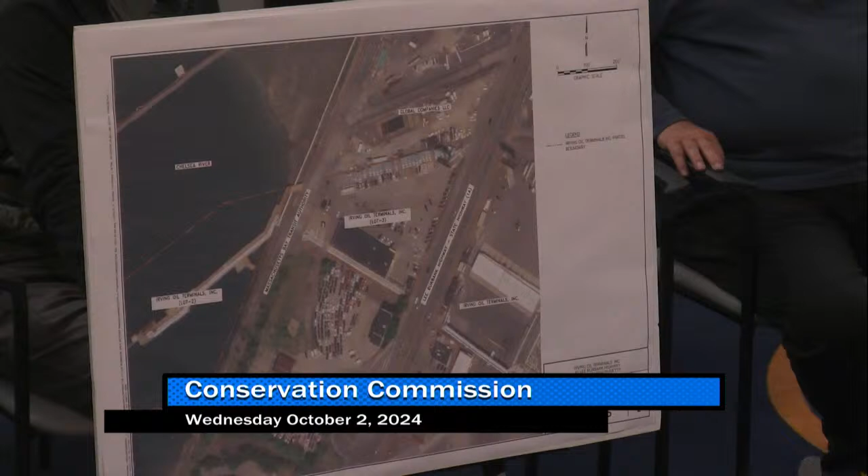The project is basically a routine inspection of underground pipelines. Essentially what Irving needs to do is daylight those pipelines. It's a shallow excavation project in two localized areas.

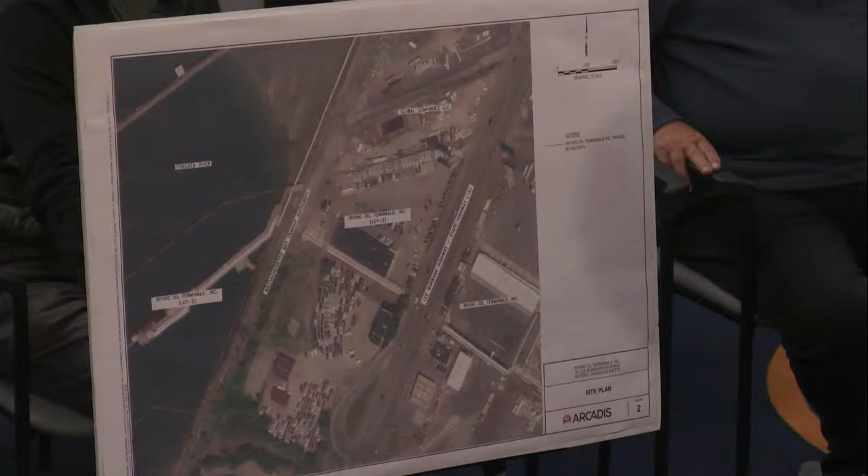Yeah, bring it right over. Yeah, there you go. Pulling a fast one on us. If you can see that, it'll be, we should be able to get it up on the camera. There we go, back it up just a little bit.

While he gets set up, basically they're going to excavate the pipes. They have a planned laydown area for what they excavate out, and they will be putting it right back. They'll have erosion controls in place, probably, I'm assuming. I can't speak to that just yet, but you did send some photos over of where you're going to be doing the soil lay down, and we want to make sure there's no leaks in this area, so it's definitely mandatory work at this point, but that they won't be making any impact.

I can't remember the exact depth, what was it, 2.5 feet or 3 feet? If you put it on the other side of the podium, the camera will be able to see it better. If you move it further, literally on the other side, yeah, right there. We can all see it too. How's that? Perfect, and then we can see it up on the camera.

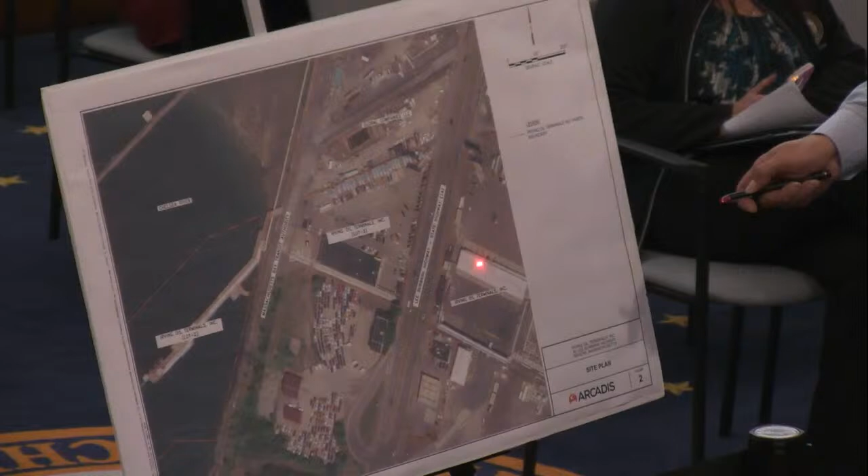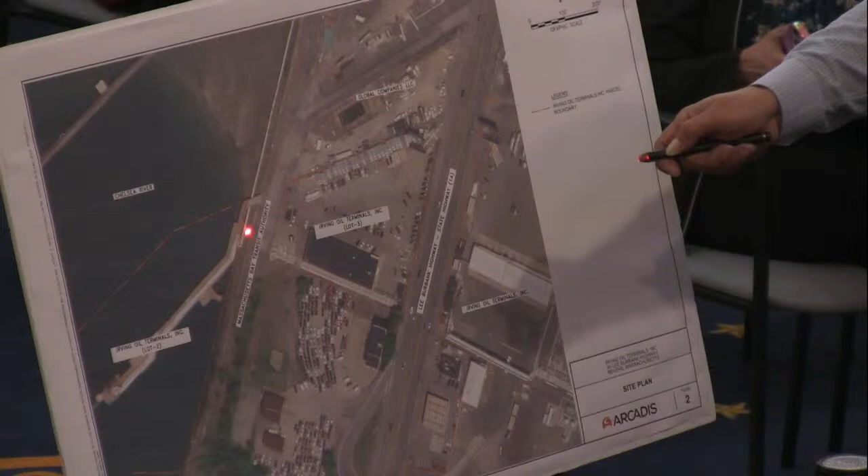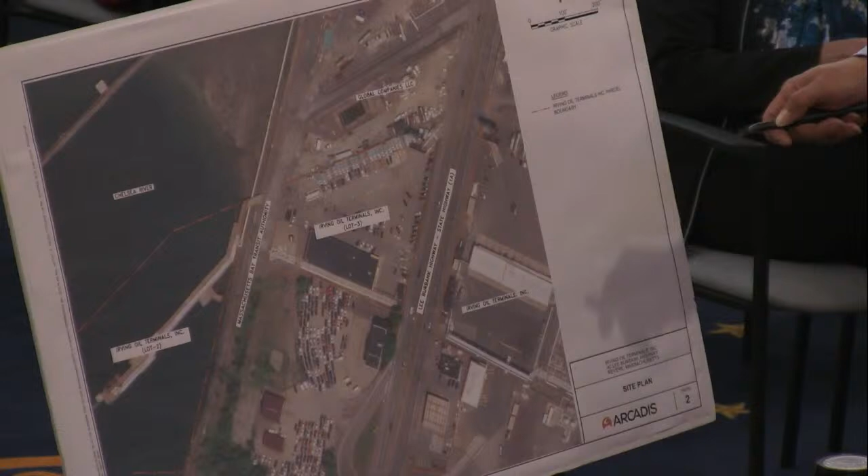Thank you. So the excavation is going to be about roughly 4.5 to 5 feet. Okay, so basically, this is Burbank Highway here. Irving Terminals owns property on the eastern side of the highway, and then also on this western side. We're working adjacent, essentially in the upland area adjacent to this pier location. You can see the white pipeline that's daylighted along the pier, comes across this MBTA property and then traverses up towards the Irving Terminal. The area we want to dig in specifically is two locations shown in red here, a little bigger here. This is approximately 30 feet in width, and this excavation is 30 by 14, I believe, and then this one is 30 by 4 feet.

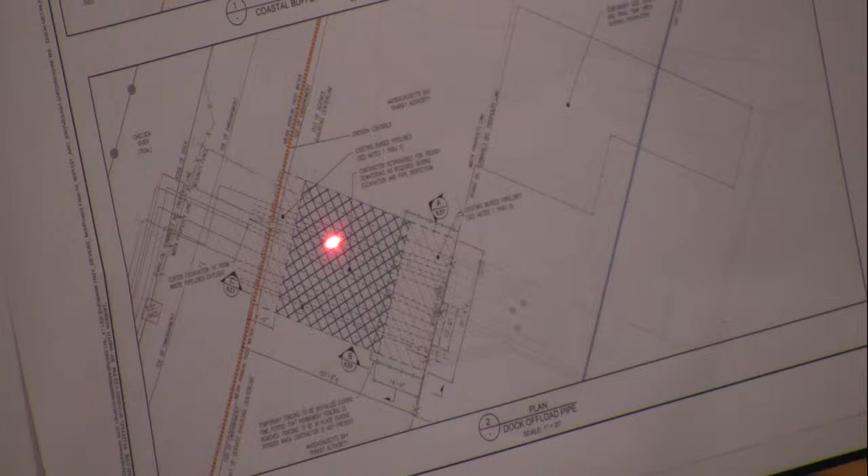So the ones that are on the outside are where you'll be excavating, correct? Correct. Okay, and what are you using for erosion controls on the pier side? Because it's pretty close over there, or not that close, but you still have the train tracks involved.

Right, we would be excavating essentially right adjacent to those former railroad tracks, which still have some ties there. It's definitely arduous work once you get closer to the pipe, so it won't be using an excavator to throw it all around. It's going to be time-consuming to get around it, but from what I perceive from the project, the way you explained it during our site visit.

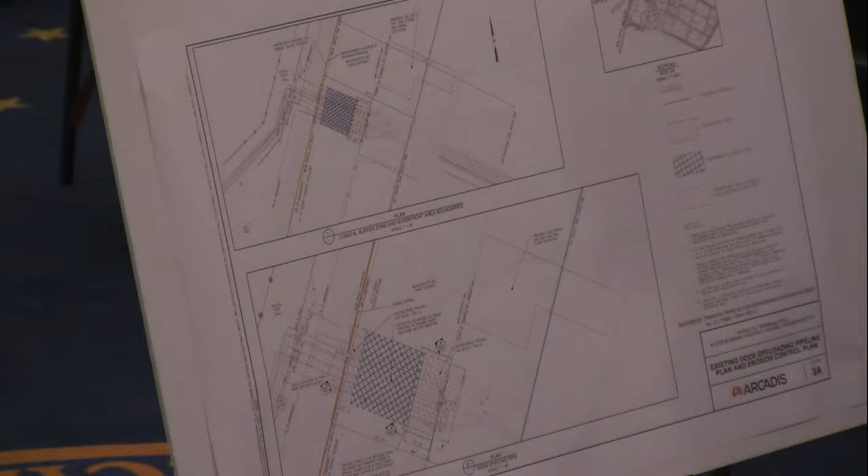So I'm pretty comfortable with this, but at this time I'd like to ask any of the commissioners if they have any questions. Yes, Mr. Chairman.

One simple question. It's not going anywhere near the Lee Burbank Highway, it's all on the Irving property, correct? The actual dig is on MBTA property, and then we're going to be staging soils temporarily on the Irving property.

And the other question, these pipes are taking material from where to where? It's coming from tanker, from the pier, offloaded through the pipeline, and then back up onto Irving property.

You know, I seem to recall a few years back that you came before us, I think you were shoring up the bulkheads and the pier that Irving has. Wasn't that so a few years ago? That came before us for that?

I don't remember that. It's possible, I have no knowledge of that though. Well, I've been on for a long time. And I thought if it had something to do with that project, there was a request for determination for the adjacent property. Global had a release of oil, and okay, I'm familiar with that one though.

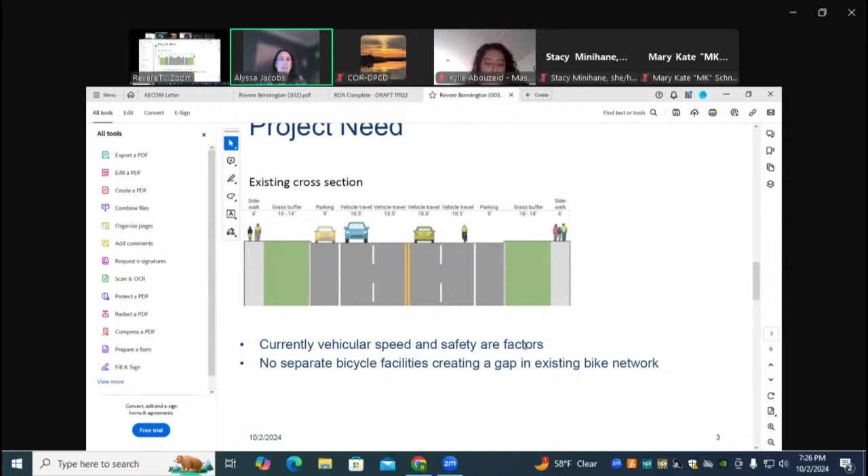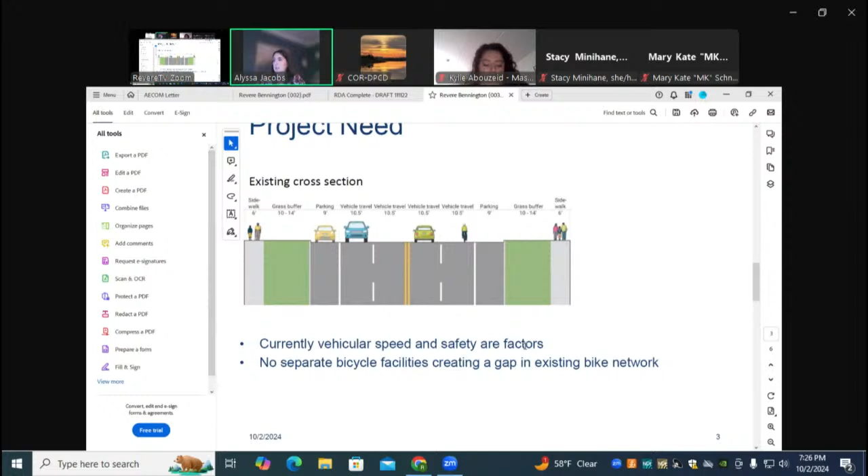So this slide shows the existing cross section, which has two travel lanes in each direction, parking on each side, as well as a grassy strip or grass buffer separating the sidewalk from the roadway. Based on some traffic studies that were done, vehicular speed and safety are factors, and this section of roadway also does not contain any separate bicycle facilities, and it creates a gap in the existing bicycle network. Next slide please.

The proposed work activities are designed to modify the cross section of the roadway. It is a curb-to-curb project, so there's no work outside the existing roadway limits. It'll be milling and paving of the roadway, creation of a separated bike lane along the east side of the roadway, and this will be a dual direction bike lane. There'll be a reduction of travel lanes from 4 lanes to 2 with a creation of a shared center turn lane. Parking will be limited to the west side of the roadway, and there'll be installation of signage, roadway markings, and stanchions for lane separation.

Best management practices to be implemented during construction to protect the adjoining resource areas include silt sacks in the catch basins and other erosion and sediment controls that may be determined necessary. As you can see at the bottom is the new proposed cross section, maintaining the sidewalk and grass buffer, with parking now just on one side of the roadway.

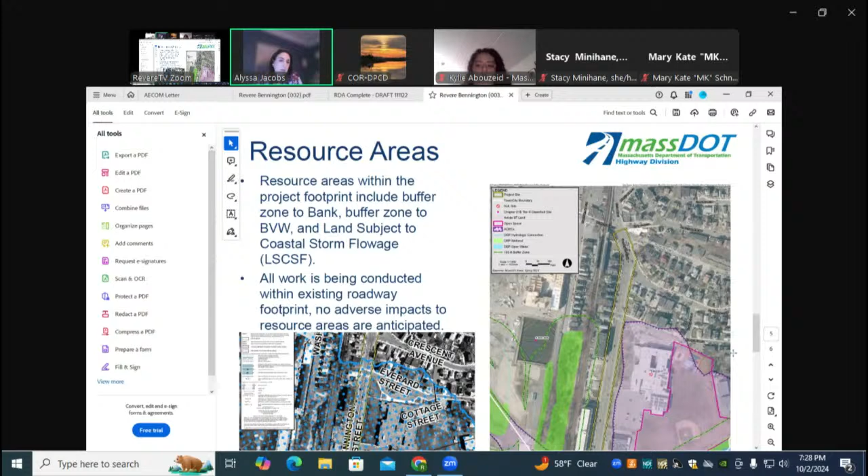The resource areas that the work is proposed in are primarily the buffer zone to Bank and BVW, as well as the 100-year coastal floodplain. All work is being conducted within the existing roadway footprint, and we don't anticipate any adverse impacts to resource areas. There'll be no change in floodplain elevation within the roadway. That is really the project in a nutshell. The portions of the project within the buffer zone are technically exempt under the Wetlands Protection Act, but as we are predominantly also in land subject to coastal storm flowage, those are not so exempt. So we're here to request a negative determination that we do not need to file an NOI and that there will not be any impacts to resource areas.

Excellent, thank you very much. I had a chance to walk this down, and it was definitely something that is not going to make a huge impact to the adjacent resource areas. With land subject to coastal storm flowage not really having a standard, it's best practices. They definitely will be having erosion controls, silt sacks in catch basins all along the milling area and the work that is going to be done. I would call for questions about adding this bike path if there are any more.

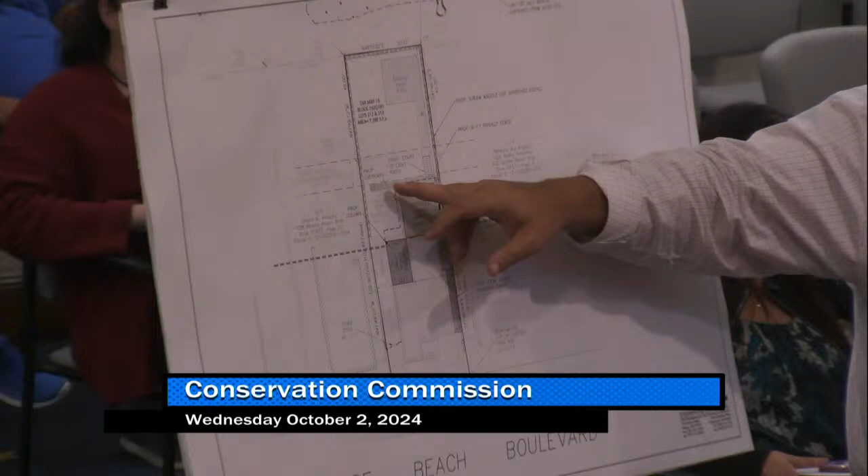Thank you, Mr. Chairman, members of the commission. For the record, Rick Salvo with Engineering Alliance, here this evening on behalf of Marsha Lucinta, the property owner at 630 Revere Beach Boulevard. You might recall this project was before you back in 2021 under DEP file number 61777 to do some grading in the backyard. They installed a patio back here, and there was an infiltration trench and trench drain installed to mitigate water runoff.

That runoff comes off of the asphalt driveway, goes into the trench drain located right over here, and into that infiltration trench. That received a certificate of compliance back in 2022, and now they're looking to make some more improvements to their house.

Again, it's a single-family dwelling, so relative to the stormwater regulations, it's exempt. It includes the construction of about a 544 square foot garage that will be constructed at grade at about elevation 7.6.

It also includes the construction of a mudroom and an office, which is 253 square feet. That will be elevated up off the ground at the first floor level, supported on wooden columns, so it'll have virtually no impact to the floodplain.

And also a mudroom on the opposite side of the house, about 100 square feet, 99.8 square feet. That too will be located at the first floor elevation, supported on wooden columns. And then there'll be a ramp constructed out of that mudroom to get out to the front of the house to provide handicap access into the dwelling.

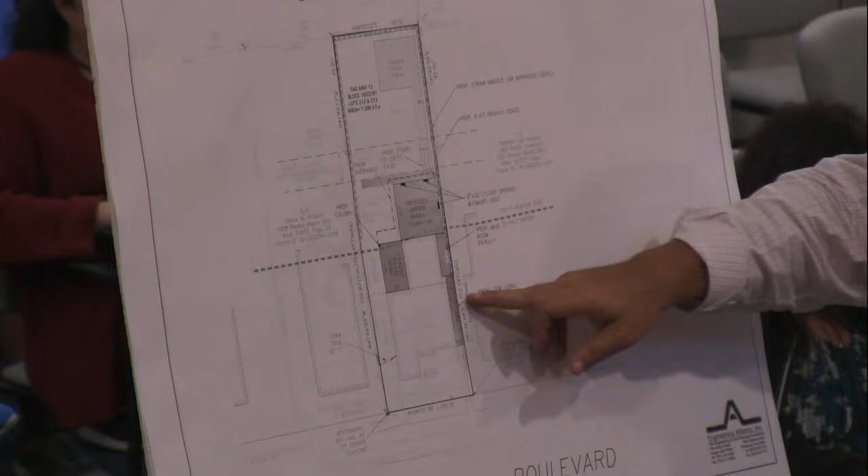You'll notice everything is pretty tight to the property line. This did go before the Board of Appeals last month and received unanimous approval for a zoning variance. The major condition that came out of that was the installation of a 6-foot privacy fence along the northerly property line, shown on these plans as well.

Is that going to be a shared fence, or is it going to be on one person's property or the other? Just curious, because it is very tight over there. It'll be just on our side of the property line. At some points it might be straddling the property line, but it'll be mainly on our property line.

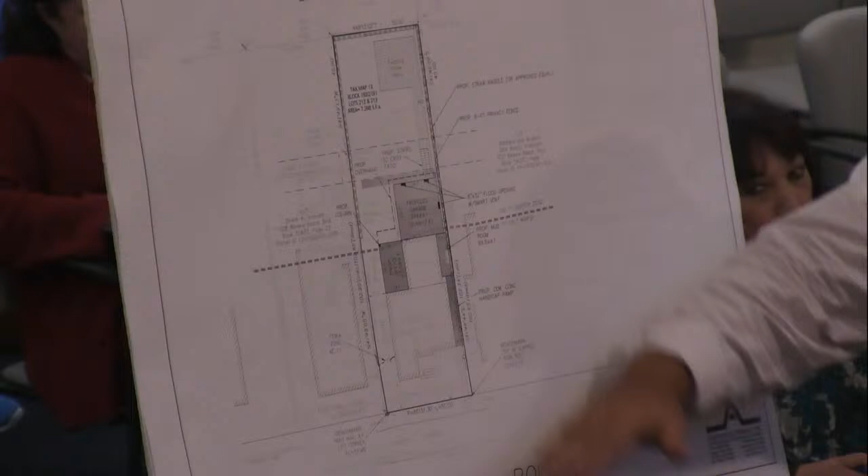The resource areas present here are land subject to coastal storm flowage, elevation 11, right here. So the front portion of the site is outside of the floodplain, while the whole rear portion of the site is within the 100-year floodplain. There's also a salt marsh located off-site behind our property, so the garage addition will be within that 100-foot buffer zone associated with the salt marsh.

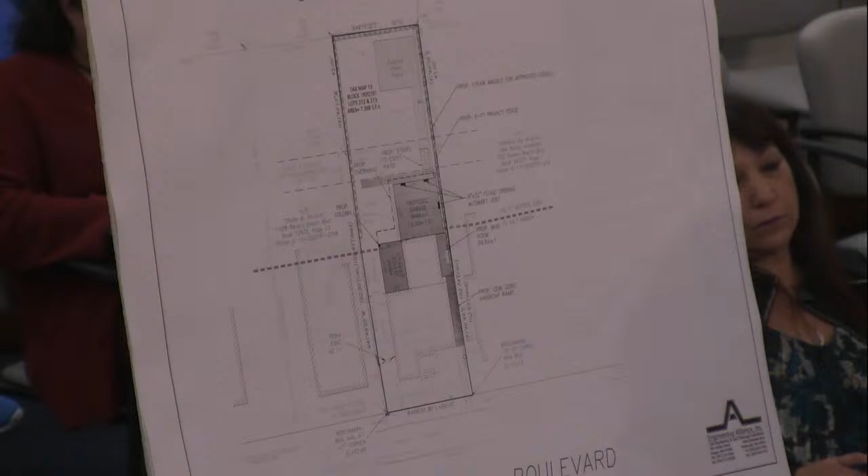The proposed garage is going to be built largely over an area that's already an existing cement concrete pad, so there's a very minimal increase in impervious surfaces there. It's already a concrete pad, so there isn't much change.

However, because the elevation of that will be below the floodplain, we will be providing flow-through foundations, 3 openings that are 8 inches high by 32 inches wide, which will exceed the building code and the FEMA requirement for 1 square inch of opening per square foot of enclosure within 1 foot of grade.

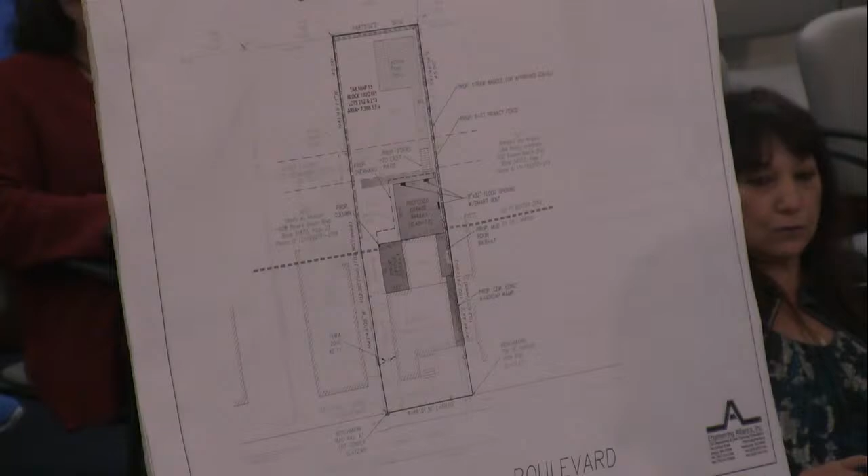The site will be surrounded by straw wattles during construction for temporary erosion control measures, to make sure none of the fines make their way down into the salt marsh. And that's essentially the proposal before you.

So I guess with that, I turn it back to the commission for any questions or comments. Again, we don't have a file number yet, so we expect that this will be continued until next month, and hopefully within the coming weeks we'll get the filing number and be able to move forward.

That's unfortunate that we don't have a file number, but understandable, these things do happen. I like that it has ample flow-through foundation because it's below grade.

The office, I didn't realize it was going to be on stilts or pilings. Yeah, that's another nice addition to be able to flow through.

My question about the ramp on the right side of the property, how are you going to be stabilizing that throughout the course of the ramp? What are you going to use for foundations? It'll be a cement concrete ramp, I believe. I think that was talked about during the ZBA. So the whole ramp is going to be concrete, that's right. And I just question whether that is going to create runoff to the neighbor.

No, because it's all pitched. It's a ramp, so it'll be pitched to the middle, not perpendicular to the property line, but parallel to the property line. Okay, all right, that makes a lot more sense. I just couldn't visualize it at first.

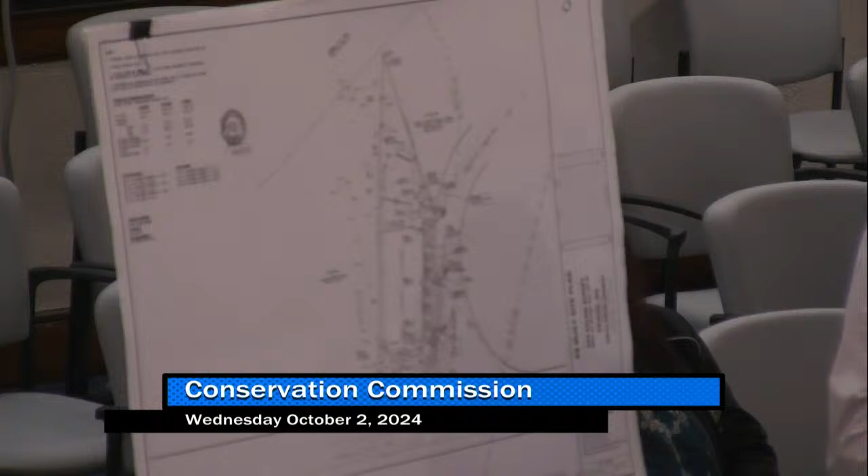And the rest of the property, dare I say, was the same. So it has been a major improvement. The construction on pilings, for the most part, is giving it a good flow through as well. And considering the landscaping and property improvements that you've made, I would have no problem issuing a certificate of compliance. I'd like to hear the thoughts of any of our other commissioners at this time, if you have anything to add. Nope? Okay. Anything from the audience about this?

At this time, I'd like to call for a motion to approve the certificate of compliance for 344 Salem Street. I'll make a motion for the certificate of compliance. I second. All in favor? Aye. Aye. Aye. Thank you very much. We'll be in touch, Rick. Thank you very much.

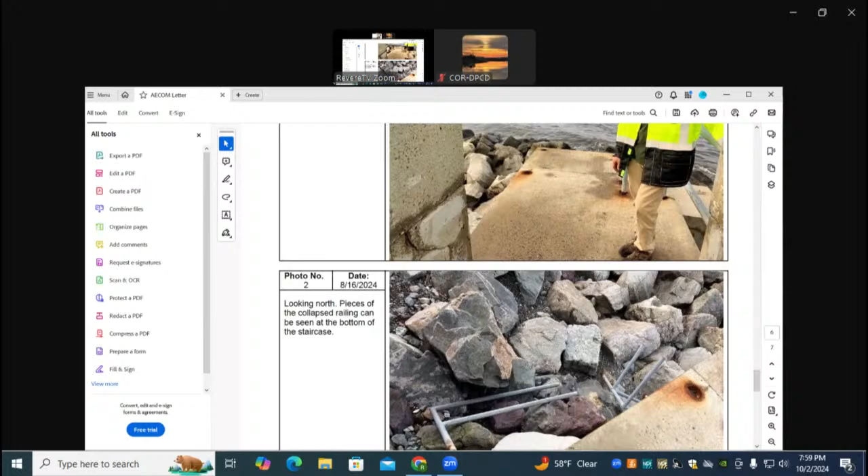Next, are you ready for the emergency certification? So this was sent out to notify that we needed to make repairs in an emergency situation. To follow up, it was stairs - I can't remember exactly where - but it was a staircase railing that detached by one of the access points on Winthrop Short Beach Parkway. Excuse me. And as you can see, it was pretty extensive. The railings were definitely all over the place.

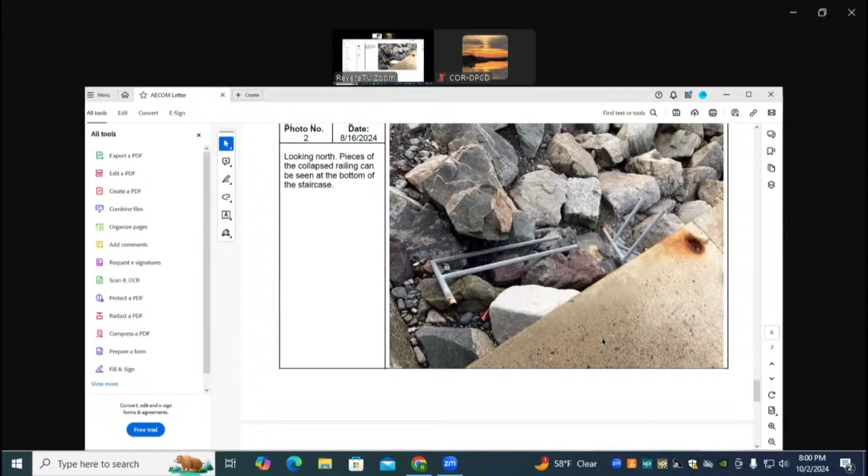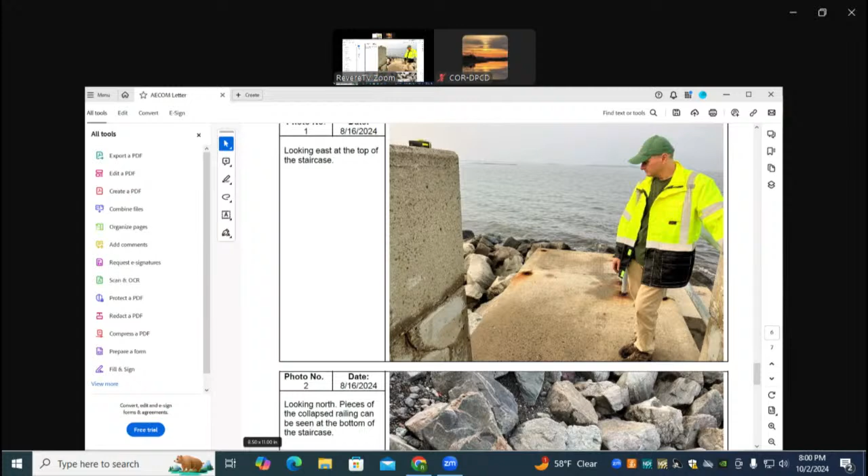And if you can cut through to the actual repairs with it in place - yeah, we got notified by AECOM that the work had been completed on September 24th. I believe so, yes. It was just one of those access points, and I don't have the image in front of me, but it's on the Revere Conservation Commission. I do recall seeing the email thread, and I'm sure most of you saw this as well. I would call for, seeing as how the work is done and the permit is in and filed, for us to just approve the emergency certification.

So I would call for a motion to approve. I'll make a motion to approve the emergency certification. Second? Second. All in favor? Aye. Aye. Excellent. Aye. All right, we'll have to sign off on that.

We did have some enforcement this meeting, but I don't know if anybody is here to present for it at this time, so we'll have to continue that till next meeting. We did have - was it 24 Neponset Street? They were putting fill in down in a floodplain. And then we had another, it was 12 Pearl Ave, a concrete wall that was put up adjacent to areas of environmental or critical environmental concern. They were also in the floodplain as well. But we'll get to that next meeting.

At this time, I'd like to open it up for any discussion. The first topic would definitely be to attend the MACC Fall Conference this October 19th. It'll be good for our new commissioners, as well as just refreshing and bringing up things we've already covered or things you might be a little unfamiliar with. It's a good opportunity to sharpen your skills, so to speak. So I encourage both of our new members to attend, and some of our other commissioners, maybe you might find something useful out of it. There are all sorts of things you can be exposed to, as well as a good networking opportunity with other conservation commissioners going through exactly what we are. So I put that out to all of you.